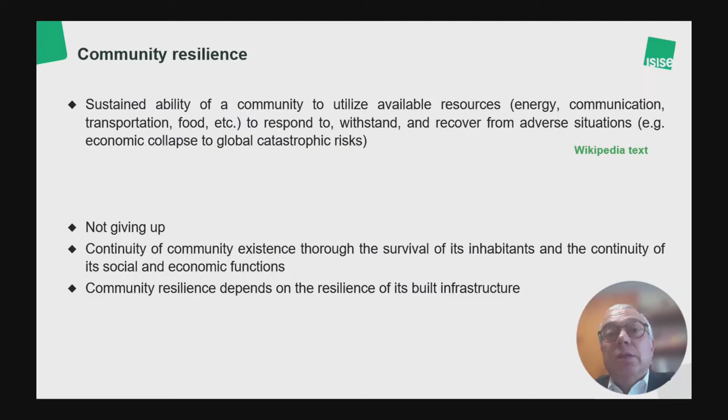When we talk about risk, we have to talk about resilience. And what you have there is a definition of Wikipedia. Well, resilience is about not giving up. It's about our communities continuing to exist, survive, both the inhabitants, but also the social and economic functions. And of course, community resilience is very much dependent on the resilience of the built infrastructure.

Now, when we talk about resilience, there are different things we can talk about, but housing is only a part of it because our infrastructure is very complex and interconnected. And often, when you have a disaster, you experience cascading failures. And so reducing the risk in only one system is not enough.

And what you can see there in the presentation is that you can have different responses to a disaster. So there is a time to absorb the disaster, there is a time to recover from the event, and then you can have robust systems that go back to the original condition, and you can have ductile systems that have a lower performance but are still okay. You can have adapted systems that even recover to a better condition, but you can also have systems that collapse. And this is what we have to avoid.

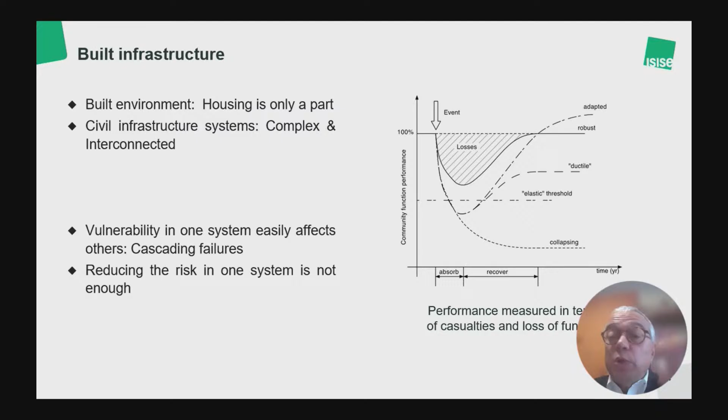Now, when we talk about risk and we talk about resilience, we talk about the capacity to anticipate, the capacity to cope, the capacity to recover. And this is all about risk management. And risk management is directly linked to risk governance. And so it has also to do with our societies and our policies and our governance.

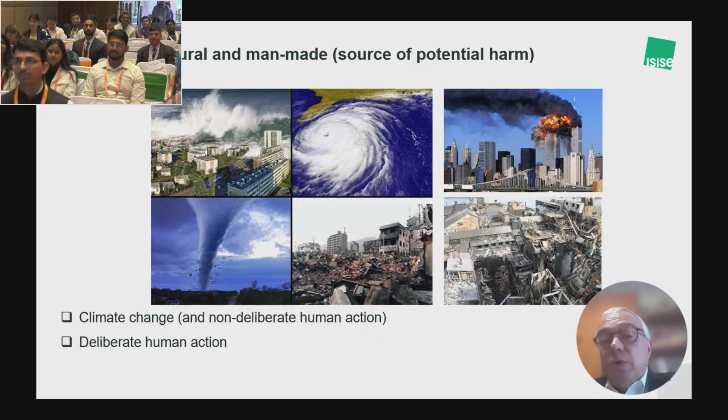Now, what I see often when people talk about risk, so resilience is a lot linked to risk management, is some mix up in concepts. So normally in engineering, we address risk as one component being hazards, and hazards can be natural and man-made. So a hazard is a source of potential harm. Of course, some of the hazards are more or less constant in time. Some of them, be it climate change, be it deliberate human destruction, they are increasing in power, they are changing.

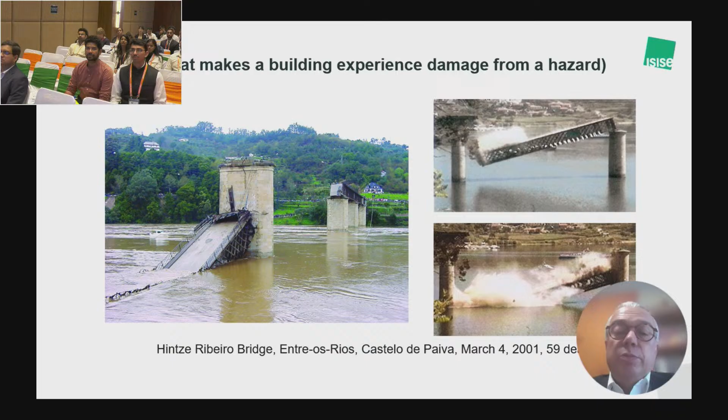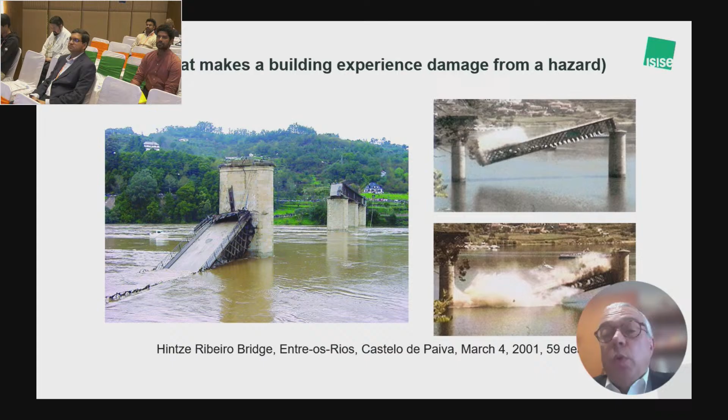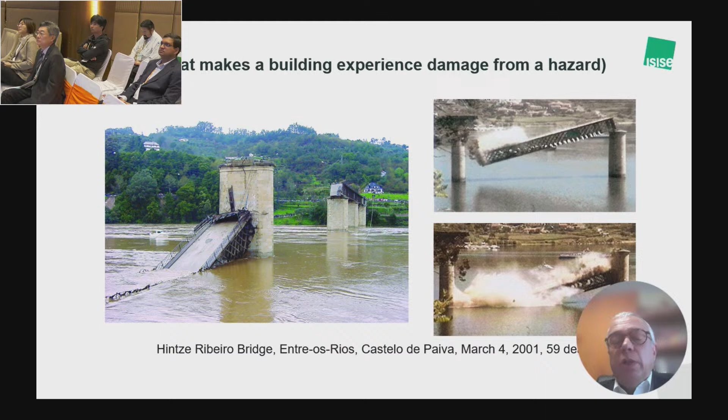We can also talk about vulnerability. Vulnerability has to do with weaknesses that make buildings experience damage from a hazard. And here you have an example of a structure which is not robust. Here you can see the collapse of a real structure where the central pier was lost because of scours, so because of foundation excavation, and then the connected decks just fall, killing the people on the bridge. These are structures that we don't like as civil engineers because they are not sufficiently robust, so they are vulnerable to an extreme event.

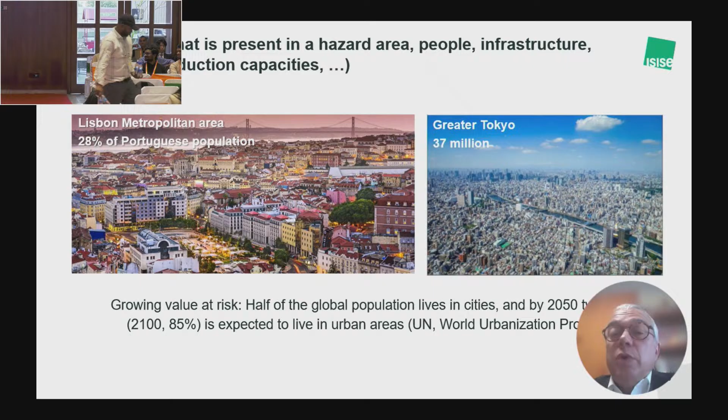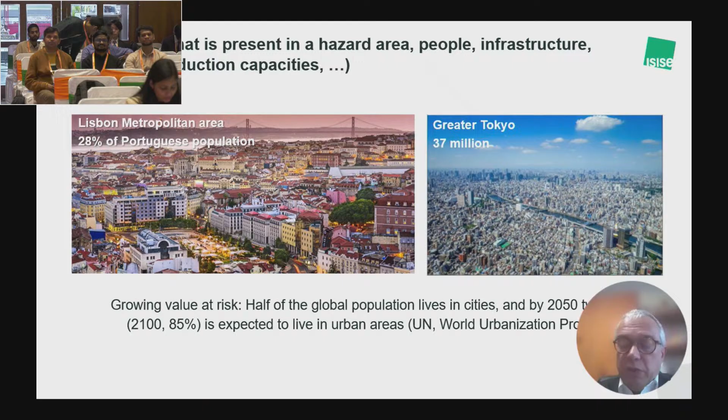And the different issue is exposure. Exposure has to do with the cost and what is present in the area. It can be people, infrastructure, housing, production capacities, all of it. And obviously, the way we live today, where we have people moving into cities very fast — you can see that if you think, for example, about our capital, it is about 30% of the entire population, and Portugal is a relatively small country, but if you look into Greater Tokyo, this is 4 times the size of Portugal. Any disaster in terms of population occurring there will have huge consequences. So the way we live, we are increasing exposure.

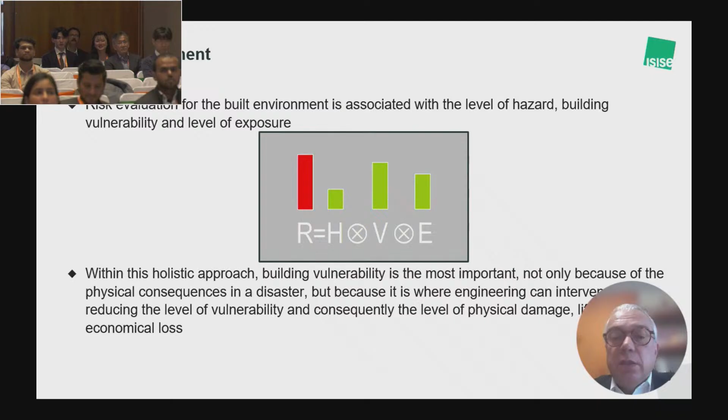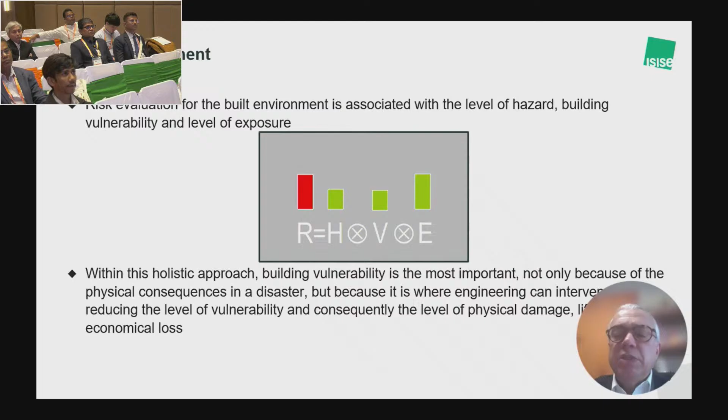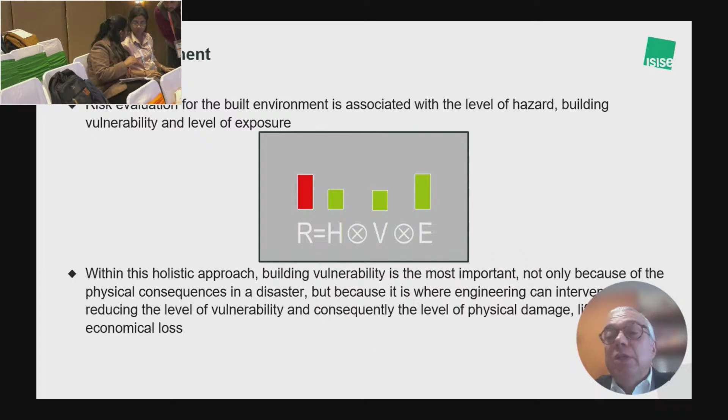Now, risk results from these different components, which is hazard, vulnerability, and exposure. So a large risk is not necessarily associated with a large hazard. If you have large exposure and very large vulnerability, the risk can be unacceptable. And from an engineering perspective, if you like to manage risk and reduce risk because it's too high, you have to address the central column, which is reducing or mitigating vulnerability. Because it's almost impossible, in most cases in engineering, to address the hazard and change it, or to change exposure. In some cases it is possible, but in most cases it is not possible. And so in engineering, we often try to address the central column, being vulnerability.

Okay, now let's talk a little bit about earthquakes and masonry. Now, earthquakes, as you can see here...

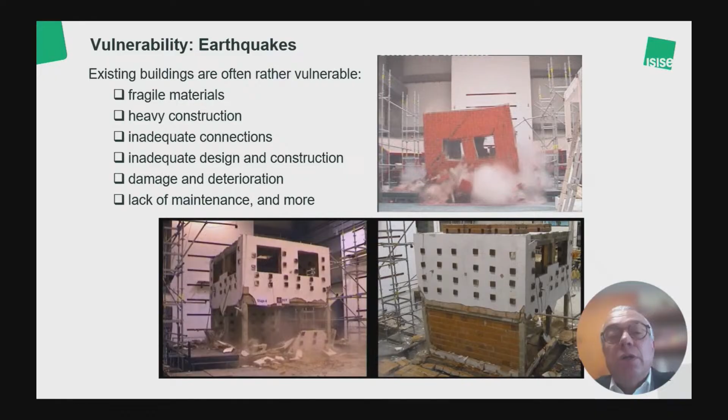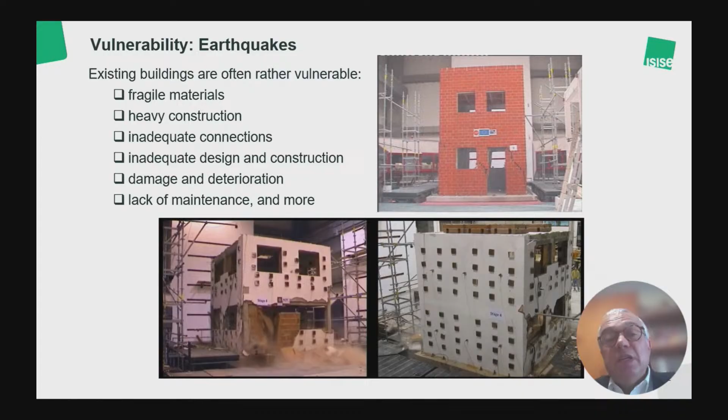They consist of a ground motion, in this case being applied in a shaking table, and the existing buildings are often very vulnerable because most of the existing buildings have been conceived for gravitational loading, for gravity, and not for extreme events, being a large flood, a large fire, a large typhoon, or a large earthquake. Normally, the materials are fragile, the construction is very heavy, the connections are inadequate, often the design and construction are inadequate, and damage and deterioration is there because the building is existing, and often there is no maintenance.

When we look into the causes of the losses, we can see that about 60,000 people die per year due to natural hazards, and most of these people die because of earthquakes. So earthquakes are responsible for about 60% of natural disaster deaths, and in most cases, again, about 60% is in masonry buildings.

It depends extensively across our globe on how much of the built heritage is made of unreinforced masonry, but grossly across the globe we have about half of it. So we're talking about the buildings which are most vulnerable.

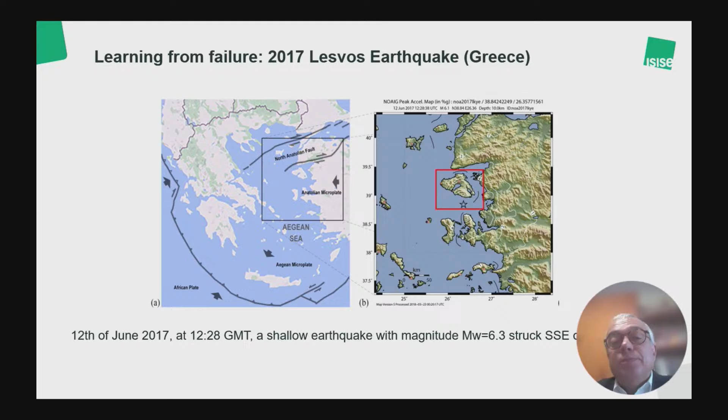Here I show you some examples of collapses because of an earthquake that we were involved in, in Greece. This is a magnitude 6.3 earthquake. This earthquake, as you can see, produced a lot of damage out of plane.

You can see here that the masonry is quite bad quality. A lot of the stones are round, and the mortar is seemingly quite weak. As a consequence, here you can see that the walls have two leaves and they separate.

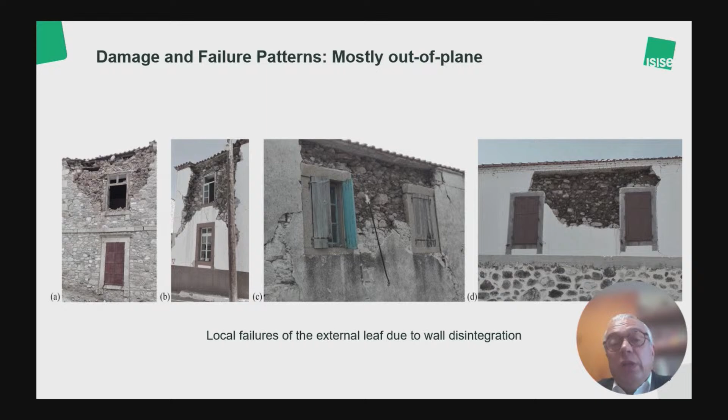Upper parts normally have a higher demand, so larger displacements, larger oscillations, and when they are not well connected, they will tend to collapse, as you can see here. These gable walls often collapse, falling in the street and killing people exiting the building.

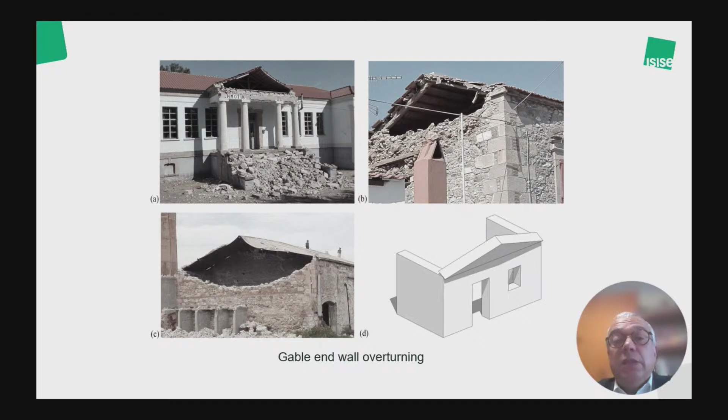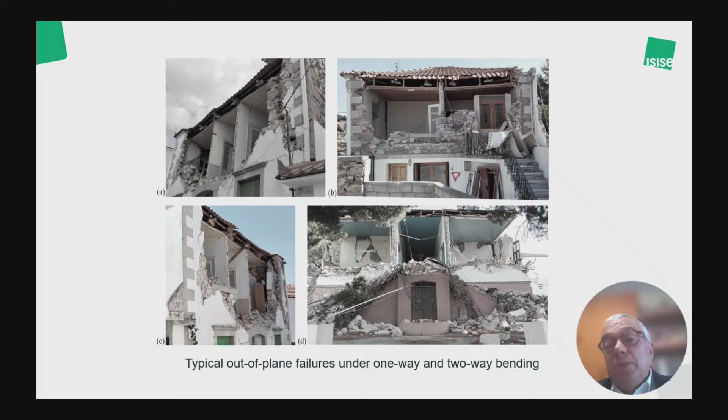So many of these buildings collapse out of plane, as you can see here, because the connections are inappropriate. They often kill the people inside and the people living in the building.

We have some examples of cultural heritage buildings or existing buildings, and these are some shaking table tests. This is basically a facade with two transverse walls subjected to an earthquake. And you can see that all of a sudden you lose everything. You kill the people inside, you kill the people outside.

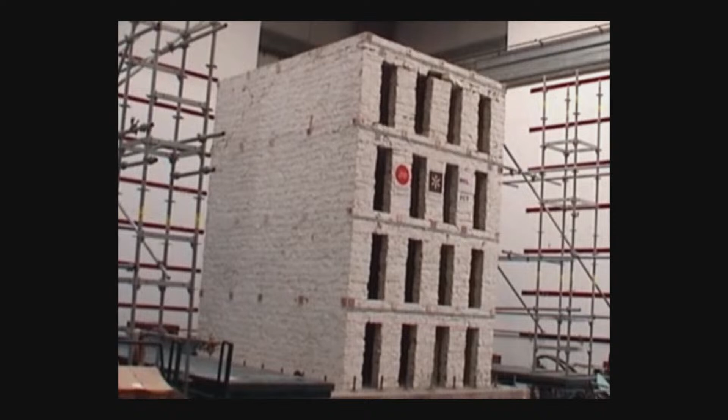Now, these are some buildings in the city center of Lisbon. You can see that they are relatively tall, and you can see that we lost the pier on top. This is not acceptable. This building, in fact, has been repaired and strengthened.

You can see here some steel plates that connect the timber joists inside, and also there are still some steel angles connecting the floors to the side walls. Just by doing this very simple intervention, it was possible to increase the capacity of the building 50%.

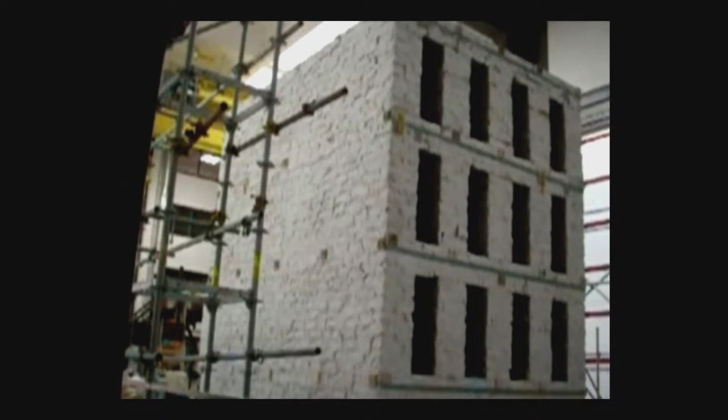And this is the same building shown from the back. You can see that the upper part will have much larger displacements, and there's a lot of in-plane and out-of-plane movement. So the piers are vibrating out-of-plane, that's why they collapse.

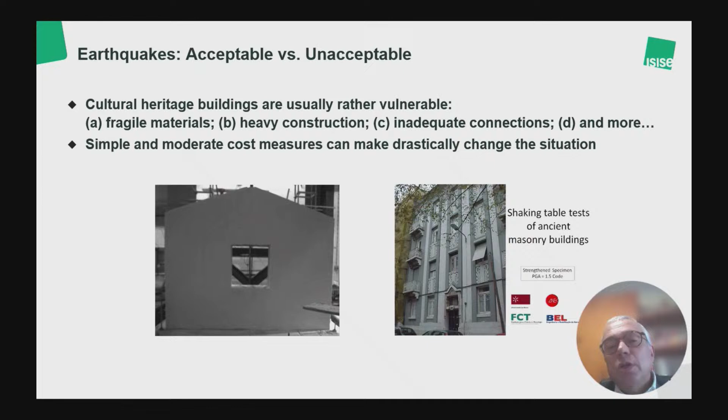Now, this was a very, very simple intervention measure. It was only connecting the floors. And by connecting the floors to the walls, we increased the capacity more than 50%.

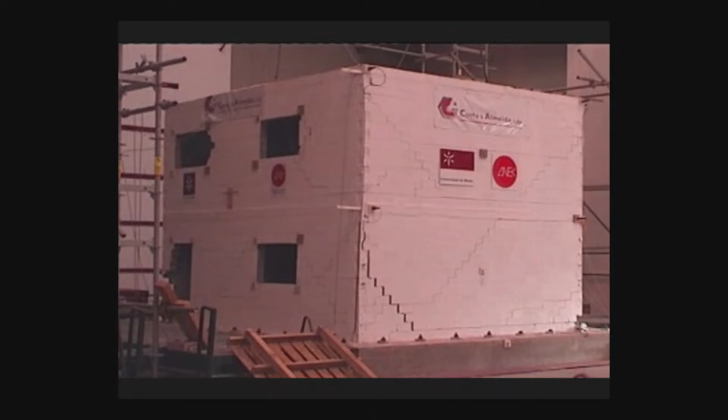Here you can see a modern building failing the way we would like masonry to fail. So here you can see a lot of diagonal cracks. All the failure is in plane. Of course, the corners and the areas next to the windows are being lost because of the in-plane movements.

But this is an exceptional response because the earthquake is extremely large. As you can see, we're losing a little bit of this corner. This corner is almost lost. There is a bit of damage, but the energy dissipation is very effective.

And in fact, as the earthquake is so large, the way we design is not to protect the building anymore. We just want to save lives and be sure people will not die because of an earthquake.

So, basically, there are two messages that I would like to share with you at this stage. Message one is if you have vulnerable buildings made of masonry, please avoid disintegration. Be sure that the material does not fall apart, because if it falls apart, there is no structural model that you can use.

The second message is to enforce connections. So connect transverse walls into the walls, connect walls with floors, connect roof with walls, and by doing this you are reducing the vulnerability extensively.

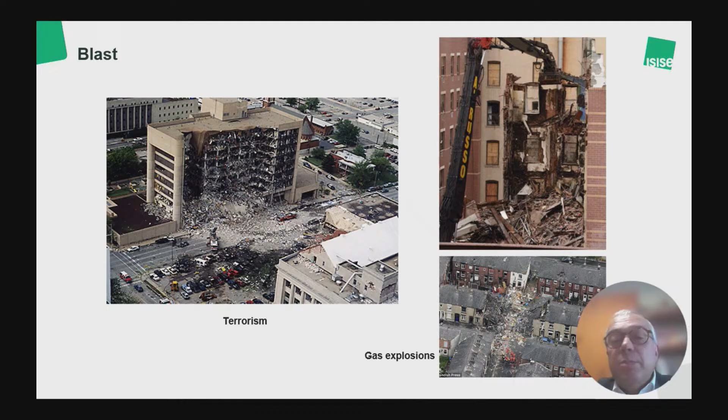Now, our built heritage is subjected to many hazards. Earthquake is the most killing, okay? But there are many other types of hazards: blast, water, impact, so this is a different type of hazard.

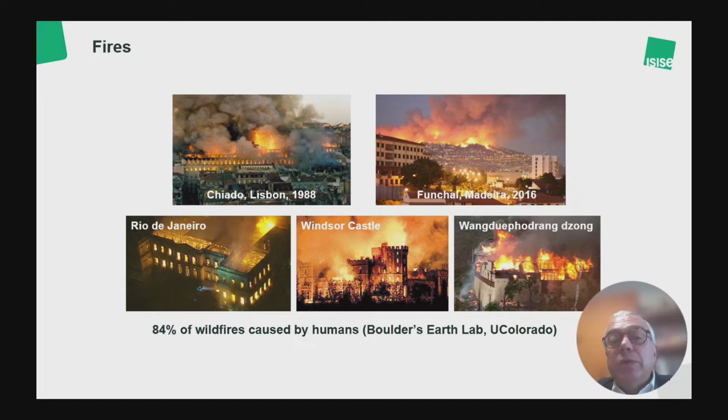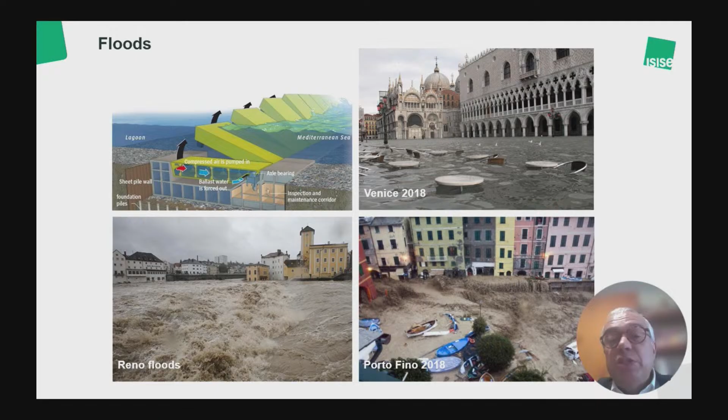We have fires, okay? Most of the fires are caused by humans. Of course, the Notre Dame Cathedral became very famous, but these fires are recurrent. We have floods, which are recurrent across the globe. We have landslides, which are also very killing disaster, very costly disaster. And we have liquefaction that always appears in special soil conditions, well, during an earthquake.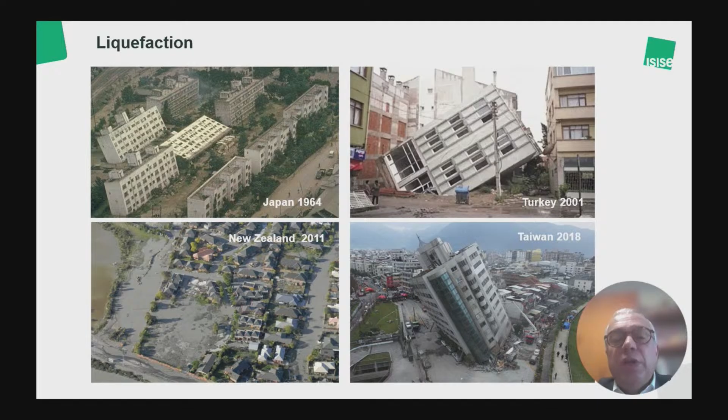Now I'll show some examples of applications at urban scale of the tools that we can use, and what we can obtain trying to address risk mitigation and risk assessment. So normally we talk about different tools at different evaluation scales.

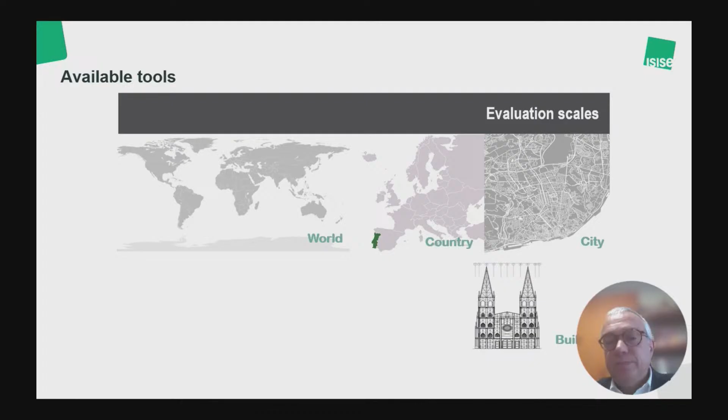And we can have the territorial scale, where you can see it can be the world, a country, or a city, where our tools do not need to be exact at the building scale, because we just want to have a big picture. So we want to be sure we understand how many people die, what is the cost of a disaster, but we do not care if a building is actually surviving or failing, because the precision is not very important.

At the building scale, the precision is very important, and then we use different tools. So the tools I'm going to show you apply at the territorial scale. They are not good to apply at the building scale. They can help, for example, for us to decide which buildings need better study, but not to be precise at the building scale.

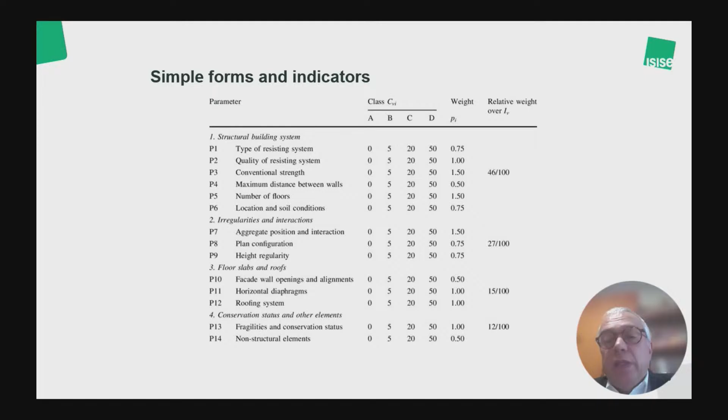And we use very simple tools that sometimes require we enter the buildings, other times we can use satellite or Google Maps images. But basically, we have indicators, things like the number of floors, the regularity of the plan configuration, or the conservation condition. And then for each of these indicators, we have a classification, listed in this case as A, B, C, D. And then we have a weight, and this weight comes from either simulations or empirical observations of real disasters.

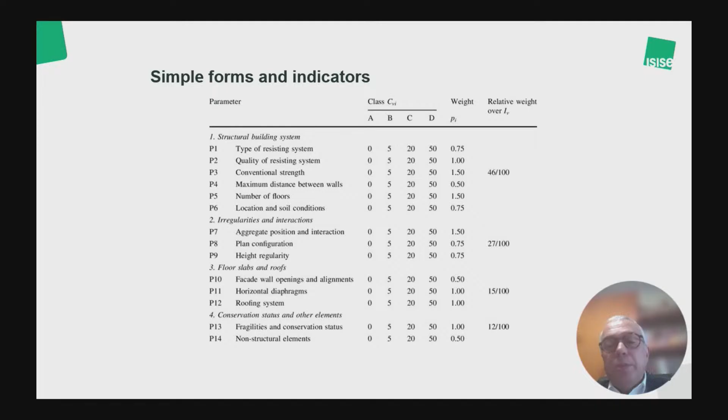In most cases, if we have earthquakes, it will come from empirical observations. And so these forms are very simple and fast to fill, allowing us to estimate risk in a relatively inexpensive and fast way. And then we can obtain data or information like this, for example.

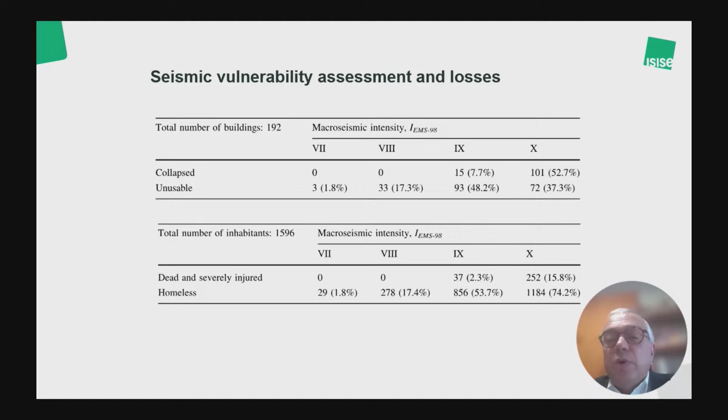For a given scale, city, or neighborhood, we can, for example, estimate how many people die, how many people are homeless, how many buildings are unusable. And that's extremely important if you have a given scenario to define how many beds you need in the hospital, or how many tents you need for temporary housing for the people.

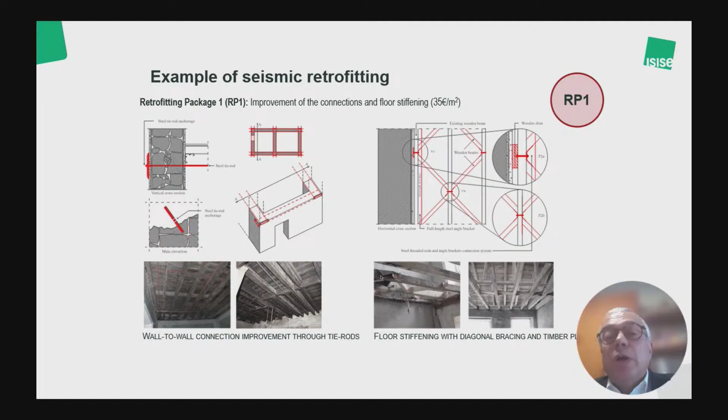We can also use these tools to apply, for example, a given seismic retrofitting package, including connecting the walls or connecting the floors, and then do a cost-benefit analysis like you can see here, considering also the economic and inactivity period after the disaster.

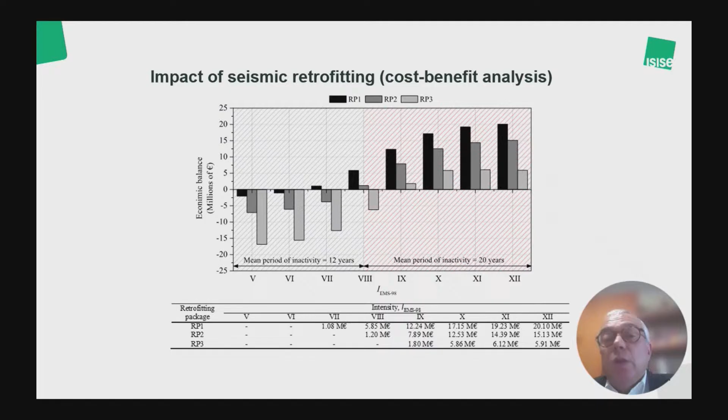So you can make a cost-benefit analysis that will show us, as a society, if our intervention will be a cost in the long term, or if it will be a benefit in the long term. And if it's a benefit, as a society, we should do the intervention. If it is a cost, as a society, we should probably not do it, or decide if the risk is unacceptable and we should put money to live with an acceptable risk. But then it's a societal decision: should we do it or not?

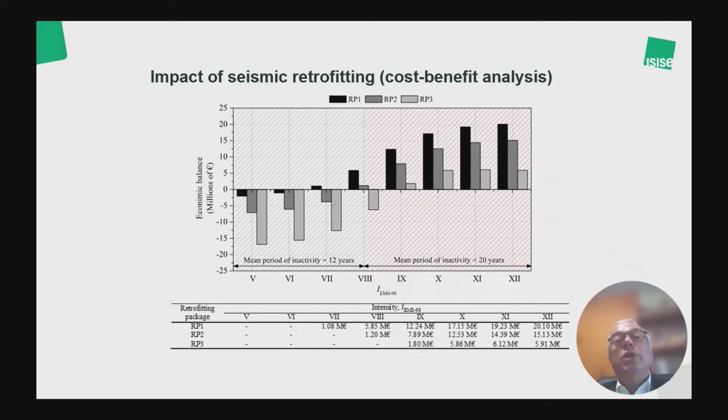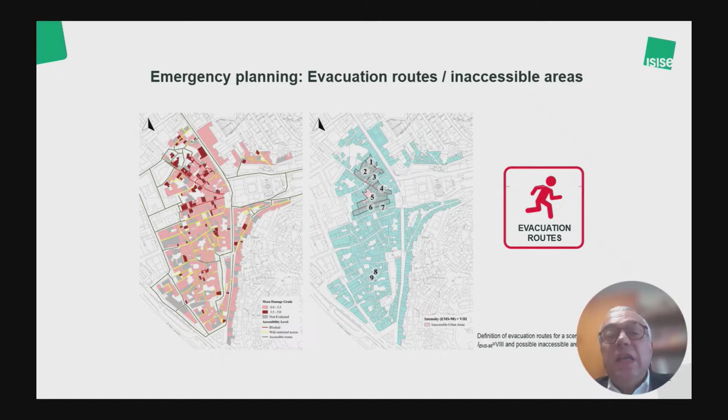Here you can also see the use of these tools to define evacuation routes, or routes that allow first aid to reach the place. Because if people cannot escape, or if emergency services cannot go, then a lot of people will die. So by using these tools, we can define selected areas for intervention to have evacuation routes.

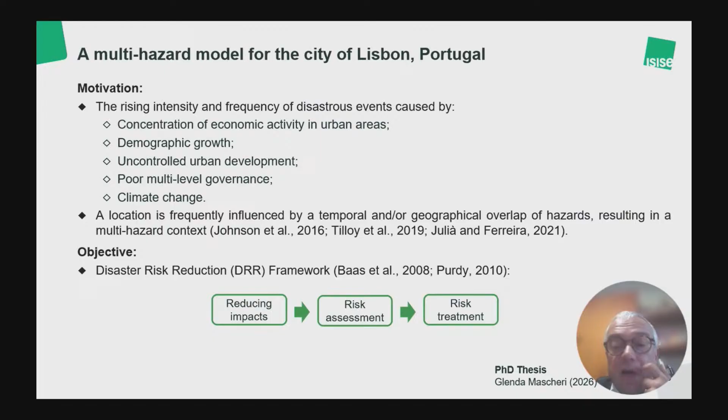Now I'm going to show you a couple of examples of multi-hazard models. I started with earthquakes, but of course we can see that the costs of disasters are increasing, our exposure is increasing, and the hazards will work together. This is the result of a PhD thesis currently being done at the University of Minho by the student Glenda Mascheri. And I showed you another definition of risk.

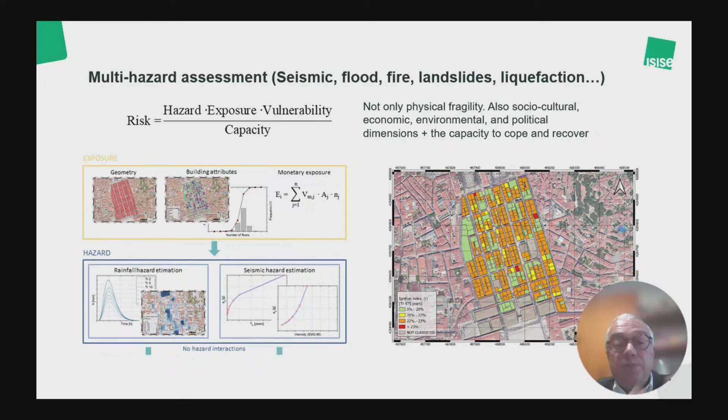So there are many definitions of risk in different fields of science. In engineering, we normally use the one I showed you before: hazard times exposure times vulnerability. But it's very important to understand also capacity. Because in fact, we are not only concerned about physical fragility, but also all the other dimensions: social, cultural, economical, environmental, political, plus the capacity of a society to cope and recover. And if there's not sufficient capacity, this increases the risk of a society, of an urban scenario.

Now, research on single hazards has advanced extensively. Multi-hazards are still an emergent and very complex field. First, they introduce different disciplines, different attitudes towards the definition of hazard, the definition of vulnerability, and the definition of exposure.

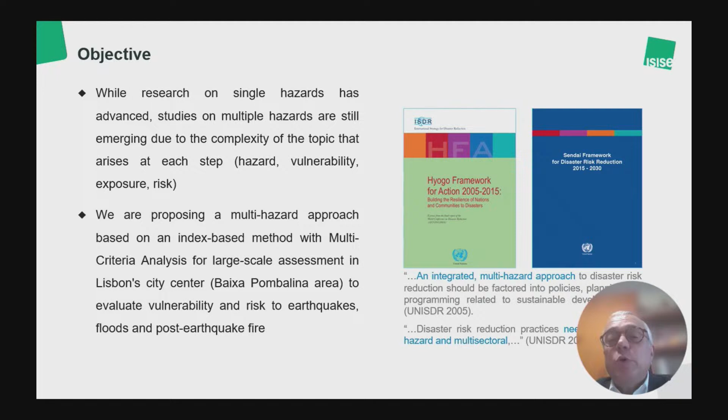The conclusion was about 30% of the population killed, 85% of the buildings destroyed. This was in the period of enlightenment in Europe, where knowledge became more democratic, accessible to more people, and all the big philosophers of the time wrote about the disaster.

In these two opposed views: the scientific approach, on we were not ready, we need to know more, use the deductive method, versus the more religious vision on what Lisbon did wrong to be punished by the wrath of God.

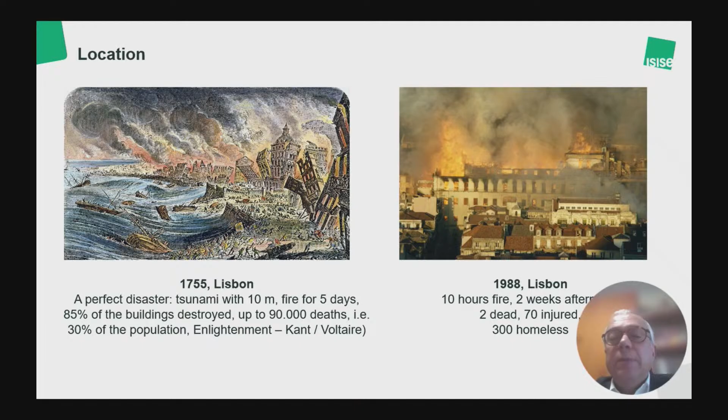Now I show you a third disaster, more recent, which was a very large fire because of multiple reasons, including past interventions that made the buildings more vulnerable and made the rescue and the access to the firemen more difficult. So there was a very large destruction in the center of Lisbon.

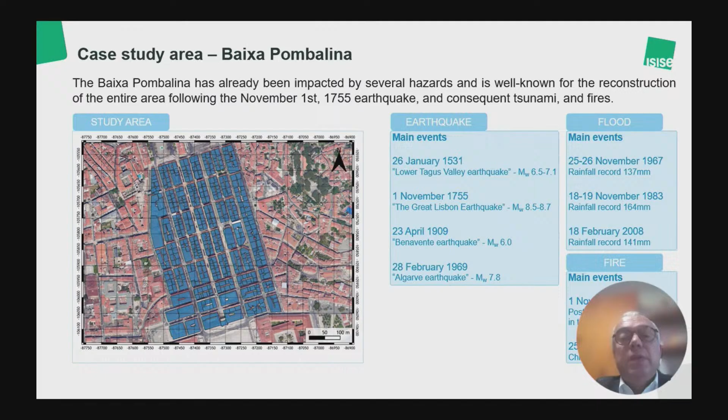And so our city center is the area, our case study is the area that was developed after the earthquake in Lisbon. So it's an area that is recently built from the 18th century. And these are some of the large events that affected the city in the distant past.

Now we started trying to characterize properly exposure, and I will finish with this. In fact, exposure is probably the most difficult part of the risk analysis to be characterized, and our risk is extremely sensitive to exposure.

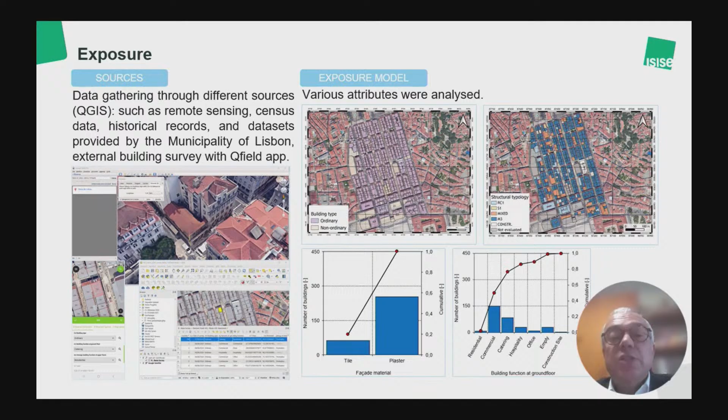So how we define the cost of human life, how we'll define the cost of interventions, of repairs, of the buildings, and of the economic functions associated to the buildings.

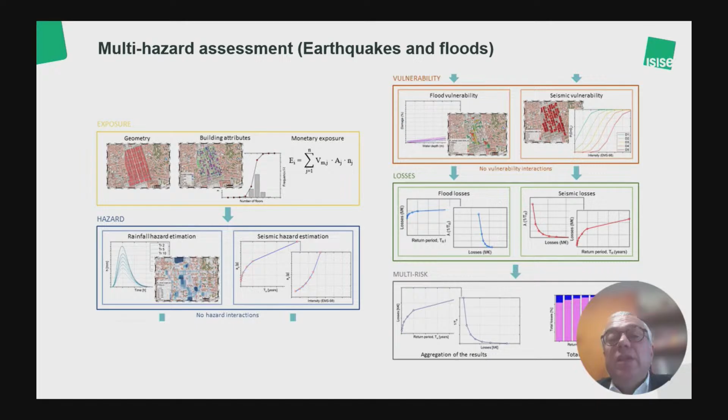And here I show you just, in a slide, what we need to do when we address multi-risk. We need to take into consideration exposure, difficult as I said, then hazard, in this case from multiple hazards, which typically adopt different approaches, different return periods, etc. You have to define if they interact or if they do not interact. Then the vulnerability, then the losses, then put it all together.

And this is an example of our results for the losses when you combine earthquakes and floods. It's very interesting to see that for short return periods, flood losses are very important, so they can reach up almost to 20%.

For very large return periods, of course, earthquakes are extremely destructive. Earthquakes add huge costs, and floods become far less important.

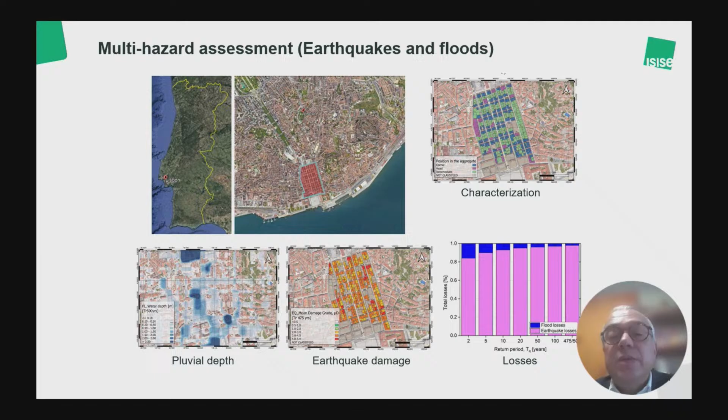Now the second example I'm showing you is our analysis on joining earthquakes and fire. In this case, it's a cascading effect, so fire ignites after the earthquake, and we take into consideration the fire ignition and the fire propagation.

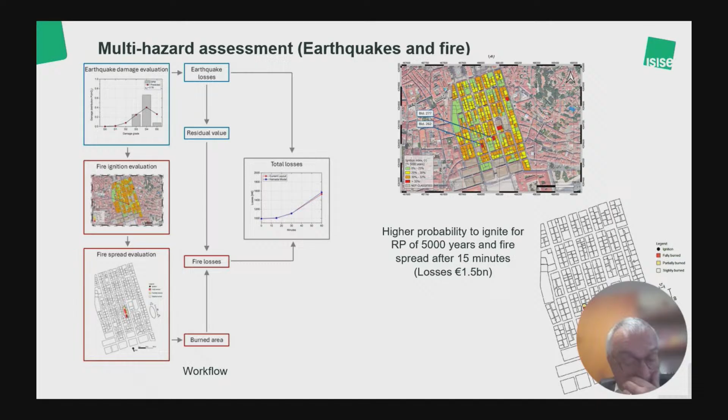And these are the losses for a 5,000 years return period, and an image also of the fire spread after 15 minutes. So we're talking about very large losses in this case.

Another example I'm going to show you is in Colombia, in Cali. I'm working together with another PhD student, who is finishing his PhD thesis also next year. We focus on non-engineered, unreinforced masonry.

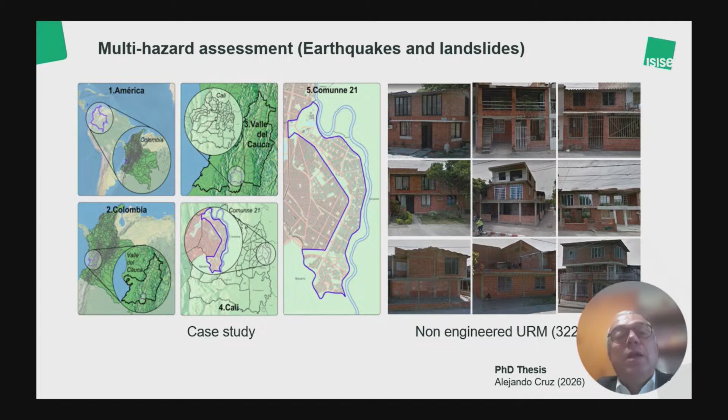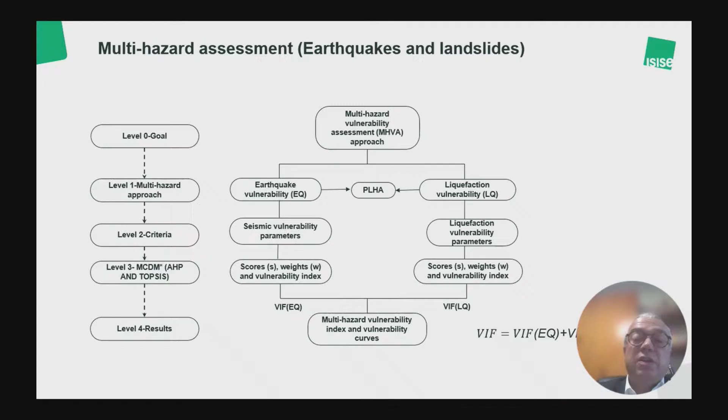Here you can see the approach, so we are combining earthquake vulnerability with liquefaction vulnerability. We have probabilistic liquefaction hazard analysis, and we take into consideration the vulnerability and combine this.

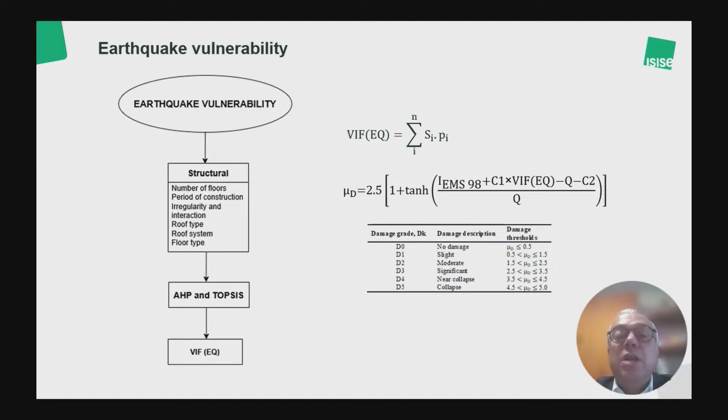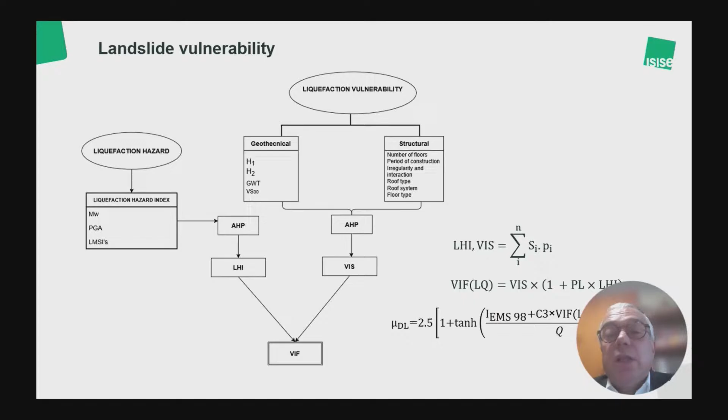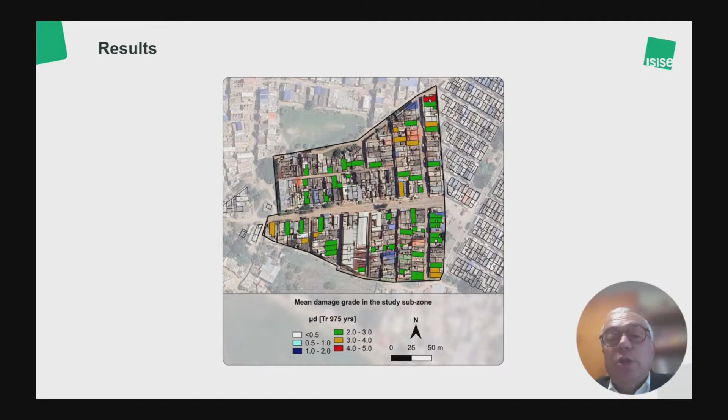For the earthquake vulnerability, it's very similar to what I showed you, some relatively simple indicators with a certain number of weights that will provide you with some damage. For the landslide, you combine the earthquake with geotechnical characteristics and structural characteristics. And then you have scenarios like this on predicting the damage because of the combination of the two events.

Now, conclusions, I'm reaching the end. I started by telling that earthquakes are the most killing natural disaster. Masonry structures are the most killing building typology, so we're right on both. We do have in engineering amazing tools to assess seismic vulnerability, both at the building level and the territorial scale or territorial level. Exposure in risk analysis is often a sort of mystery and the largest source of our uncertainty.

And when we consider multiple hazards, there are many challenges still today. But that's the only way we can address risk properly.

Now, to introduce discussion, and again, I'm sorry I'm not there for the discussion, there are many exciting topics because what we're doing involves the society. For example, I leave you with this question: how much risk do we accept as a society?

Then who should pay the cost of disasters? Because when the disaster is large, normally we all pay as taxpayers. But should this be a government insurance issue that is combined before the disaster by using also reinsurance, and not putting it all on the taxpayer afterwards?